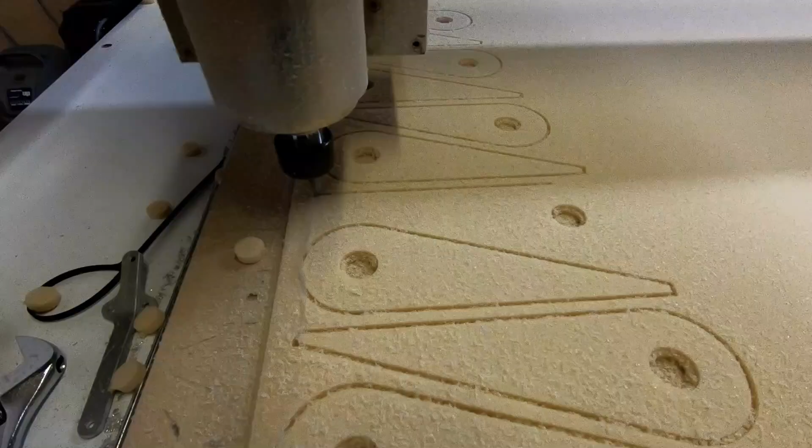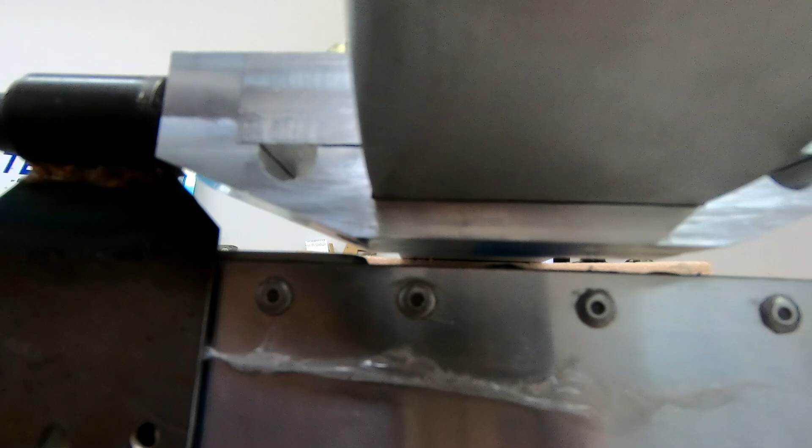Well, I've got the clamps on the gear and I've got them positioned in what appears to be the correct spot. You can see my gear has got a substantial gap underneath here. It's going to end up being about 8 millimeters from the bottom of the fuselage to here. If you look underneath the edge here, you can see the gap I have between the bottom of the clamp and the side of the fuselage.

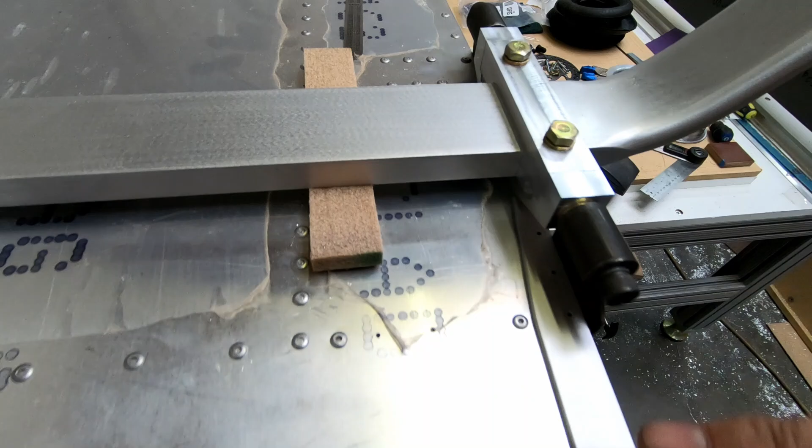Now, I'm going to get this probably another millimeter lower. You can see where the corner of this bracket is about ready to hit this doubler plate that goes over here. So what I'm going to try and do on the inside is come in here with a file and just file down the corner a little bit more, just to round this off, because I think I can get this down a little bit further.

But this is where they're supposed to be basically, even for the fiberglass gear. It should be a little bit lower than this. Like I said, it should just clear those rivets. And looking at the alignment here with the brackets, you can see I'm right on the edge of the opening of the wing spars. On the other side, I'm centered right now on the hole that needs to be widened eventually and lengthened for the wing pin that goes in the back here.

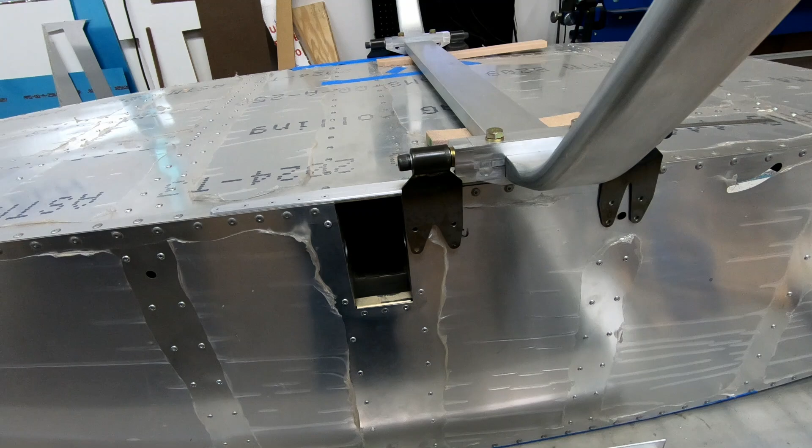So I think what I'm going to do is just go ahead and start drilling this. I don't see any reason not to. These brackets are identical on both sides, and as long as I align the front one and align the rear one with the hole, I should be sure that I'm at least square with the fuselage on both sides. So that's what I'm going to do, start seeing if I can get this attached.

Well, I drilled my first 2 holes here and flipped the fuselage right side up so I could check inside and see where those holes were ending up as far as corresponding to frame 4 here that it's going to be attached to. And I've got a couple issues here.

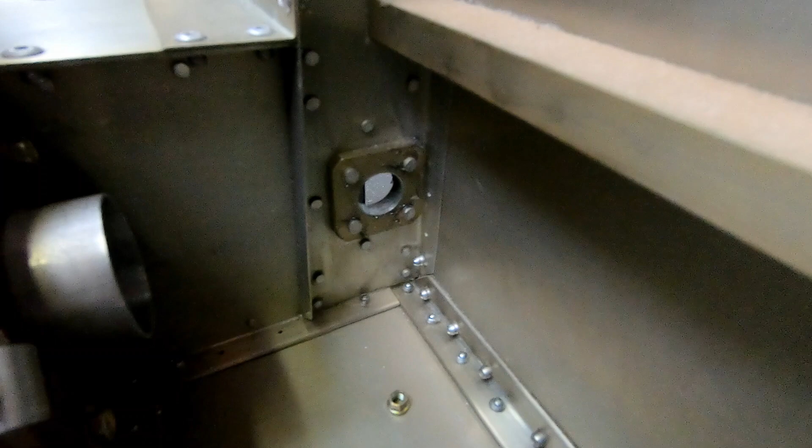So those holes come through, and I think you can see them right there. Now I've got them a little bit too close to frame 4. They're a little too far forward, but because I just drilled 1/16-inch holes, I can move them aft enough to get it a little bit more centered in frame 4 and give myself a little bit of clearance there.

But that top hole is supposed to align, apparently, with that notch that's cut out in the wing pin plate that's there, and it's actually a little bit low. I can't really raise it up on this side, because otherwise my brackets for the landing gear will hit the fuselage, and I certainly don't want to get them too close.

I'm going to come over here and grab this one here. Now, I've made these properly. I went back and remeasured these to make sure that the center of this hole lines up with the top. I've got the right distance here, I've got these holes in the right spot. So these holes are all in the right spot.

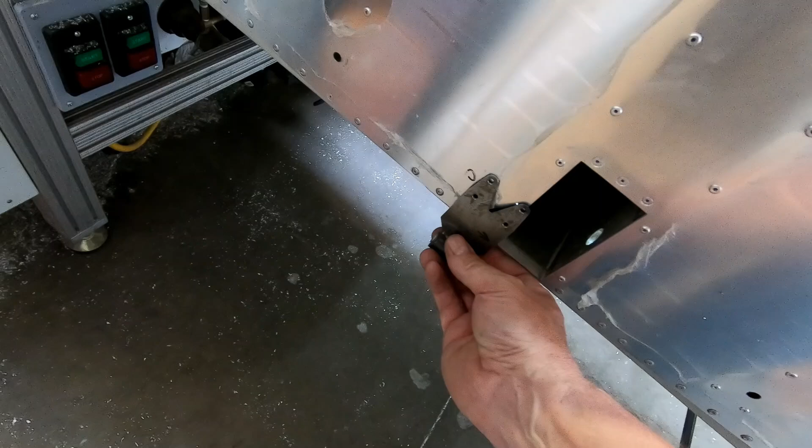But according to this, where I've drilled these holes, this is a little bit low, and I really should be raising it up a little bit more. Now, I really can't raise it up much more, like I said, or I'm going to start hitting underneath here. So I'm going to have to play around with this a little bit more and see what I need to adjust to get these 2 holes to line up.

There's a possibility, I mean, even with this nut down in here, even with the small nut, it fits. It does fit in that little hole there, but just barely. It certainly doesn't go low enough to get down to where my bolt's coming through. It's close though, so I may have to actually get a Dremel tool in here or something and just get on the edge of that plate a little bit, just to notch it out a tiny bit more, a little bit lower, to make sure this will fit.

But this is all very, very, very tight. So I'm going to keep working on this, see if I can get this first plate mounted in the right spot.

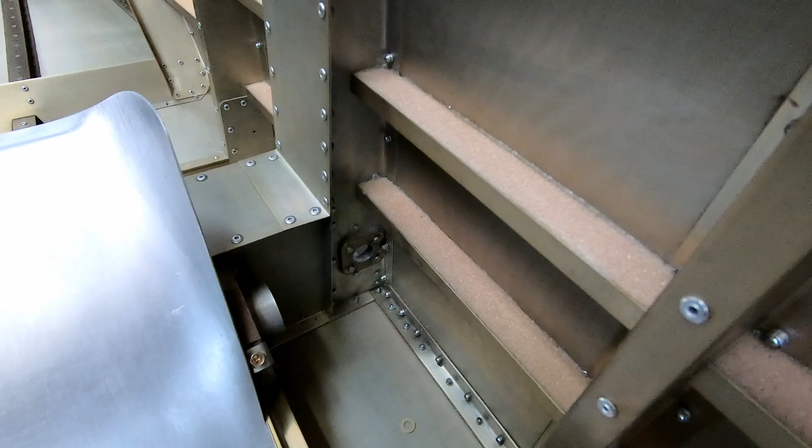And I'll show you what I end up with here in the end. I took the washer out of here and moved it to the front to move this bracket in a little bit more. That's just to make sure that I stay centered on the back here with the hole I already have, and centered on frame 5.

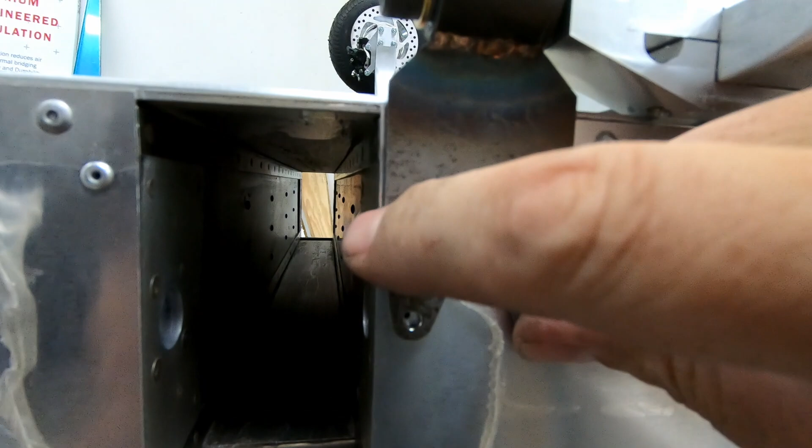And so if I hold this here now, you can see I've got a little bit of a gap between the plate and the spar box, which is fine, and I'm right on the edge of where I've already drilled my holes. So I can move those holes over a little bit, which I think will be good.

I'm going to go ahead and try and leave it at this point. What I'm going to try and do is, since I'm hitting here on the corner, I still have a little bit of gap, but that means I can trim a little more or shave down on that doubler plate on that corner to get this to come down a little more.

So I'm going to put those holes like that. I'm already stuck with wherever I drilled these already, and I can't really go outside of where those holes are. So I'm going to try and put this bracket basically right there, and I think that'll work.

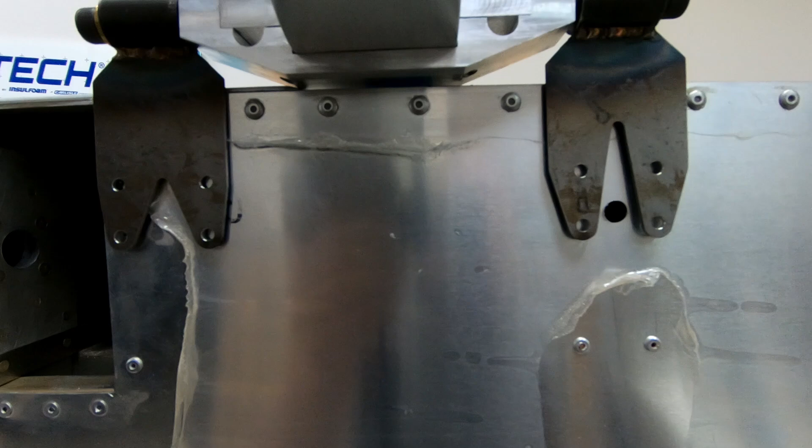What I can do with this washer is, since it's a little bit thick anyway, I'll put a thinner washer here which will push that back, and a thinner washer here which will push this forward a little bit. And because I know I'm centered on this hole, this should be centered on frame 5, so I should be good there. It's just a matter of getting this fixed and positioned in the right spot.

So I'm going to try and drill these holes right there and see what I end up with. I thought of something here when I go to fix this. Instead of finishing drilling these holes, I'm going to drill these other two holes and get some bolts in here so that this thing won't move at all.

And while I've got this aligned with the edge of the holes I've already drilled, I'm just going to use this steel plate as a guide for my drill bit to go through, so I can get through the aluminum without that hole walking around. Since I already have that, the only other option is to try and walk that hole over to the center, which I just don't want to mess with right now.

So I'm going to drill these two holes, get some bolts in here to hold this in place. Then I'll come back and drill these out, and I should be good at that point.

I've got the right side fuselage brackets drilled in. They look pretty good. I've got to flip it over though and check the inside.

But one thing I would suggest when you're working on any of the fuselage stuff is it's handy to just go to the hardware store and pick up some number 8 and some number 10 screws, nuts, and washers so that you don't have to deal with trying to use your aircraft hardware and also deal with the lock nuts.

I've been always stacking up washers on behind here, but now I'm going to run to the store and go get some number 8 bolts just to hold all this together as I'm fitting everything in place.

But you can see underneath here I've got a very slight gap above those rivets with the fitting. I am hitting on this corner, which is fine. Like I said, I'm just going to file off the end of that doubler there, and I also can do a little bit more rounding on the edges of the clamps here.

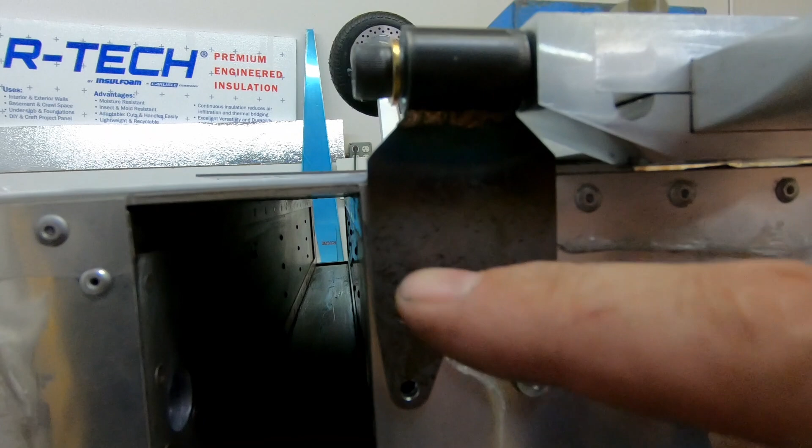But I'm going to try and position the other side in exactly the same spot. You can see the slight gap I ended up with here on the edge, just to get this away from the side of frame 4, to give myself a little bit more clearance. But this looks like it's going to work. I'm pretty happy with this.

I do need to go back and just get some thinner washers here to put on either side, just to finish getting the clamps in the right spot. But yeah, this is looking pretty good. I'm going to go ahead and try and do the exact same thing on the other side, and then I'll try and flip this over. So I've got both sides drilled now for the brackets that hold the clamps for the landing gear leg.

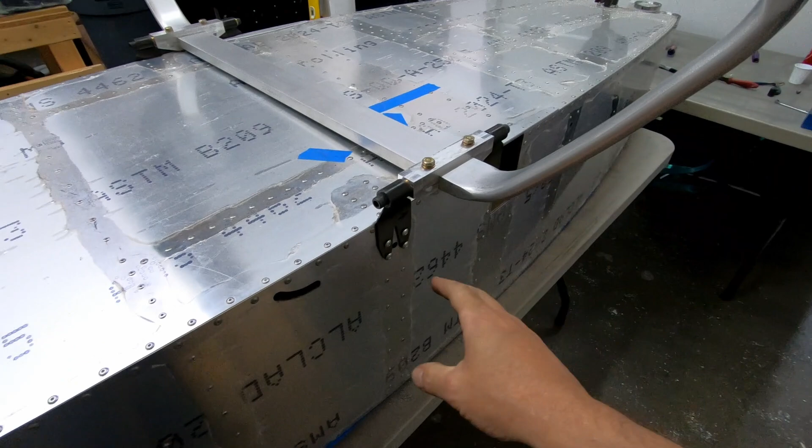I think what I'm going to do next is pull the landing gear bow off. What I can do is unbolt these here, take the leg off, put the clamp back on, then flip it over and see exactly how everything's fitting and how the holes are lining up. I'm going to get some temporary hardware at the hardware store so I can bolt this all together with complete bolts and washers, just to have it upright and actually use the gear now.

When I take this apart, I'm also going to file down and round off that corner a little bit on that bracket there. But otherwise, the gear is pretty much attached at this point, or can be attached. So now it's just a matter of getting the hardware installed.

The other thing I haven't done yet is cut out the shims that are supposed to go on both the back side and the front side of these before I permanently attach any of this. Again, I'm not sure I'm going to permanently attach this right now. I do have to take these off and paint them, and depending on what we do with the airplane as far as painting and finishing it, this might all need to come off again too. So I'm not exactly sure how permanent I'm going to make this attachment.

I really don't like to wear out the lock nuts if I don't have to, but I'm going to keep working on this, and I'll show you what it looks like when I get it right side up so we can actually look at the holes from the other side and see how things lined up.

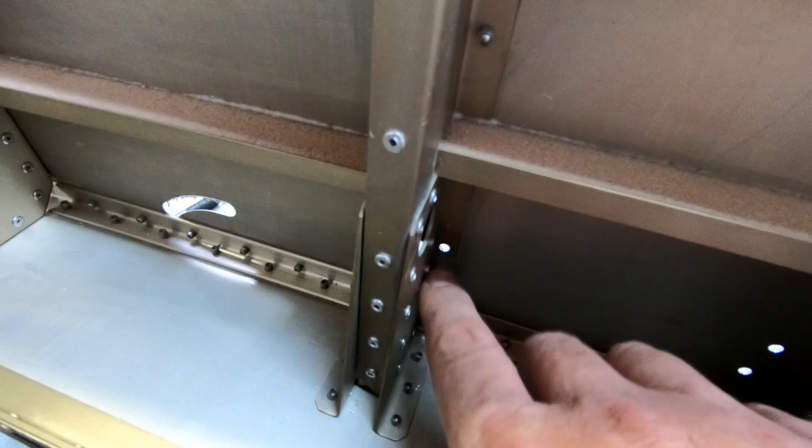The most I could do is take a washer and maybe grind off one side of it to fit it in there, which actually isn't too bad of an idea because we've got this radius inside where this frame is bent. Taking a washer and grinding off the edge until it fits flush against that frame, then rounding the bottom edge that touches this to give it that little radius. You don't want to tighten a nut here and have it hit that radius and damage it in any way, because that's where you'll end up with a crack. So I might put a washer in there and trim it to fit and radius it so it makes a nice edge with the frame.

But I still have an issue here with this top one. This is going to be really tight getting it in there, and I may have to do a little grinding away at that pin plate, just a little bit, so I can get a nut inside of there. The rest of these should be fairly easy to get to, but yeah, this looks good. This is as good as it can get.

So I'm going to go pick up the bolts I need from the hardware store to put all this back together temporarily, and get those shims cut. In fact, I might cut the shims first so I can put this all back together with the shims in place that need to be there. Then we'll get the gear on and see what it looks like with it on the ground.

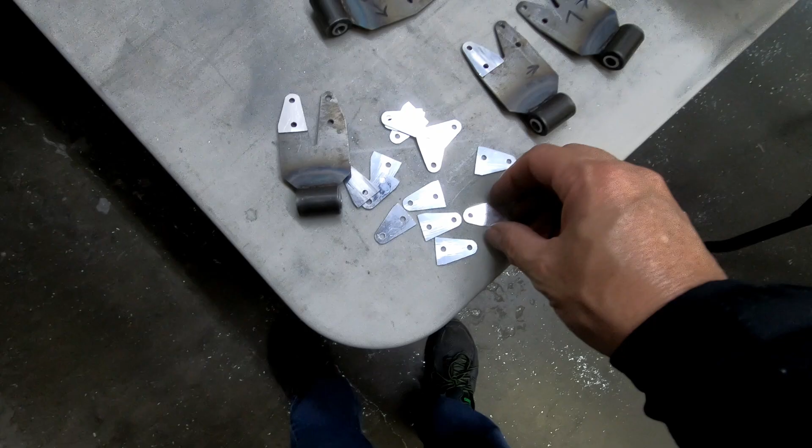So I cut out all these 40 thousandths shims that we're supposed to use with these landing gear brackets. These are actually made out of aluminum, and I originally bought a piece of 40 thousandths steel, assuming these were steel because of the steel brackets here, but they're supposed to be aluminum. Half of these are different.

Half of these brackets are matched to the profile of the rear bracket, which is this one, and the other half are matching the front bracket, which is this one. So I'm going to go ahead and assemble the gear now on the fuselage and just get this on its wheels, using temporary screws that I picked up at the local home store.

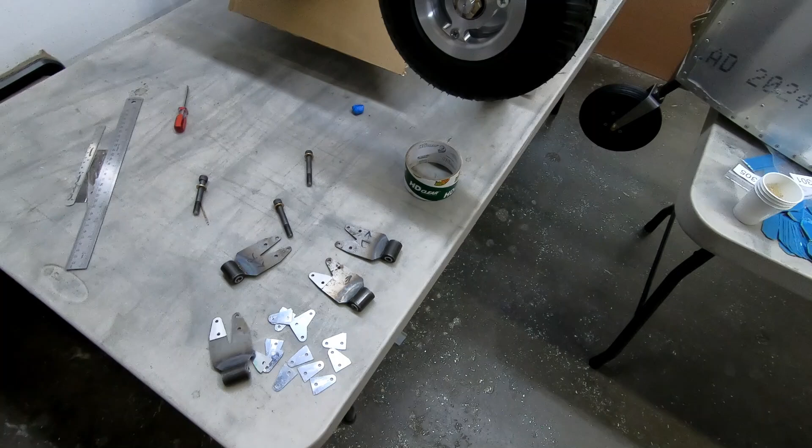I'm just going to get everything bolted together and make sure everything fits and looks good. Once I know everything fits and is exactly how I want it, I'll pull it all apart, get these steel brackets painted, get these shims alodined, and get the final finishing done on the actual clamps. Then once I get all that done, I'll put the real nuts and bolts on there and assume it's not going to come off. So I'm going to start assembling these on right now, and I'll show you what it looks like when I get the fuselage on its gear.

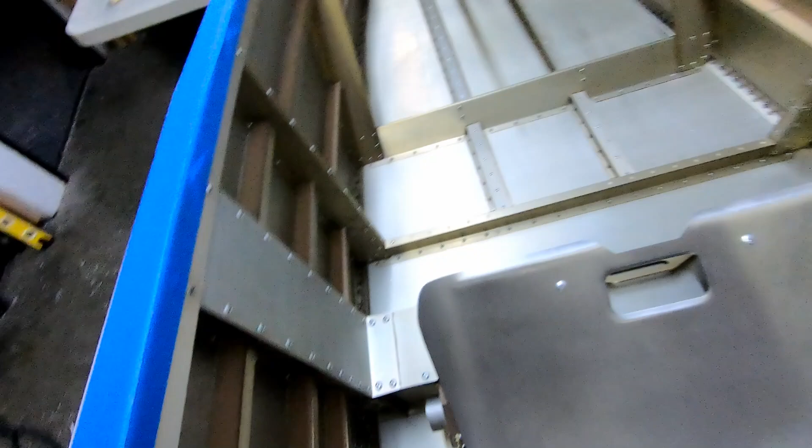Before I flip this over, I wanted to show you I got the brackets now installed with the shims on top and my temporary screws. I was able to get all the bolts in without a problem, except for these top ones here, which are hitting that pin plate for the wing spars, as you can see down there. The nuts on the rest of these just fit right between the frame and the hole, basically the flat side of the nut fitting right up against it, and that's pretty much the way they are all the way around.

Like I said, I have the same issue over here where this bolt is not lined up perfectly centered on that little notch for the pin plate. So I'm going to have to do a tiny bit of grinding in there to make sure I can get a nut inside that area. It's very close because the gap between this plate and the side here almost allows this nut to fit in there regardless. But either way I need to grind a little bit away to make sure that fits.

Okay, so I'm going to flip this over and go ahead and mount the brackets in here and get the gear on, and then I'll set this thing on the floor. Well, it's officially on the ground and on its gear.

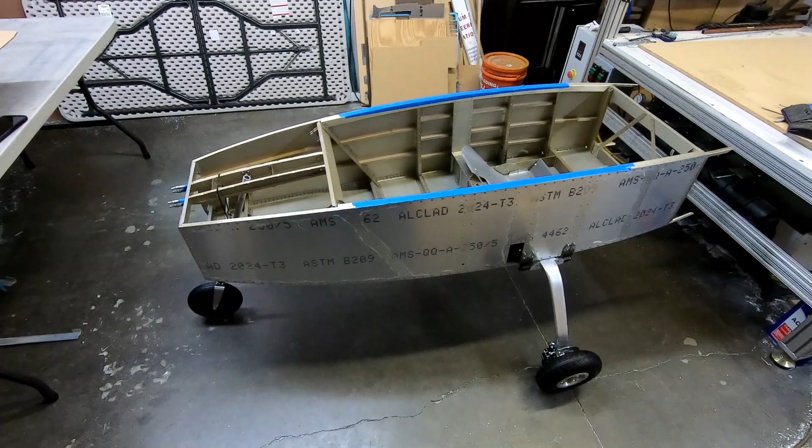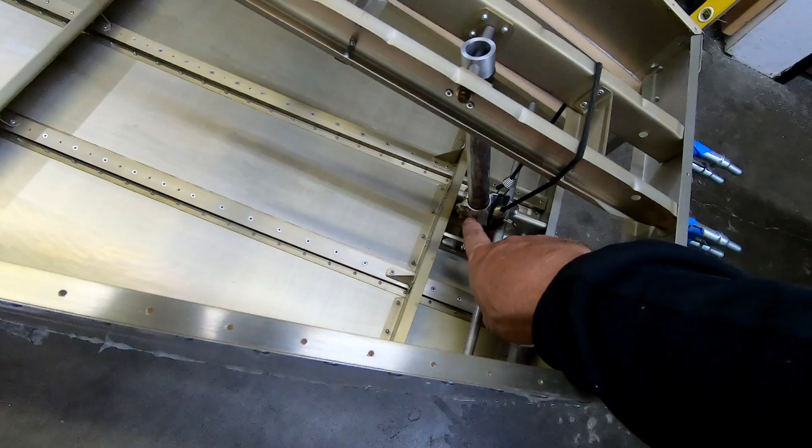It looks really good. The only thing I am noticing is that either the main gear is a little bit too tall, or the nose gear is a bit too short. Now I know the nose gear isn't short - it's made according to the plans. The only thing is that the tube I'm using, because I didn't want to waste extra material, I bought 4130 tubing in a foot length, so it's about a quarter inch shorter. However, the bracket we're using as our clamp mechanism on the front is shorter also, which moves the spring point a little bit higher. So I've actually got probably more travel on the nose gear than the standard plans configuration.

So I'm not exactly sure. It's at enough of an angle here that even putting weight in the airplane and letting the gear down a little bit further just because of the spring force isn't going to change the angle of this as much as I'm probably going to want.

Now here's what's interesting about the Grove gear - if you look down here, there's a fairly large flat plate area back here where the axle is. I could cut off the bottom of this probably an inch, basically to the top of the 5/8 axle hole, and re-drill the axle hole a little bit higher and do the 4 bolts myself. I might actually do that because I really don't like the fact that it's sitting a little bit too high here, and I don't want to extend the nose gear any further because there's only so much travel we have inside the nose to begin with.

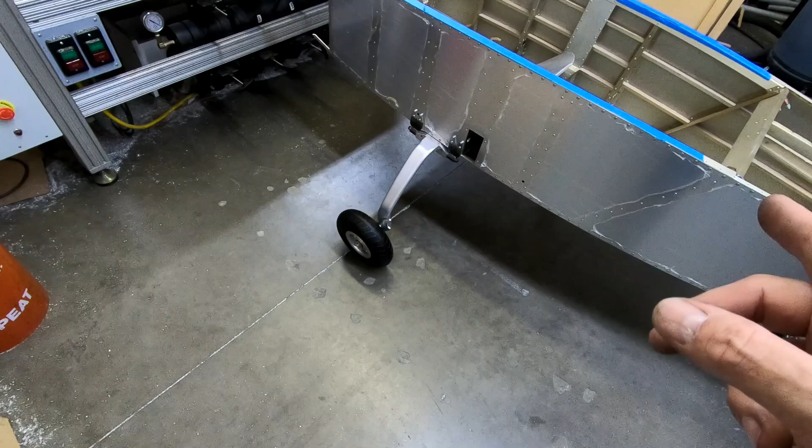But yeah, I'm actually quite surprised at this because I made this gear according to what I know other people have done for the landing gear, which is I believe 10.5 inches from basically the top of the gear leg down to the center of the axle.

I'll have to go back and look at the plans again to see if there's any dimensions on the fiberglass gear that might make a difference. But it does look like the main gear should be lowered almost an inch to make this work out. Luckily with the aluminum gear here, I do have the ability to adjust that quite a bit, and I think it'll be just fine.

That's something I'm going to look at in the future. When I get a little bit closer, I don't know if I'm going to put the tail on it next, but I might put some weight in this just to see how much this gear actually will spring down and if it makes sense to keep it like this or make it lower. I am surprised that it's sitting as high as it is.

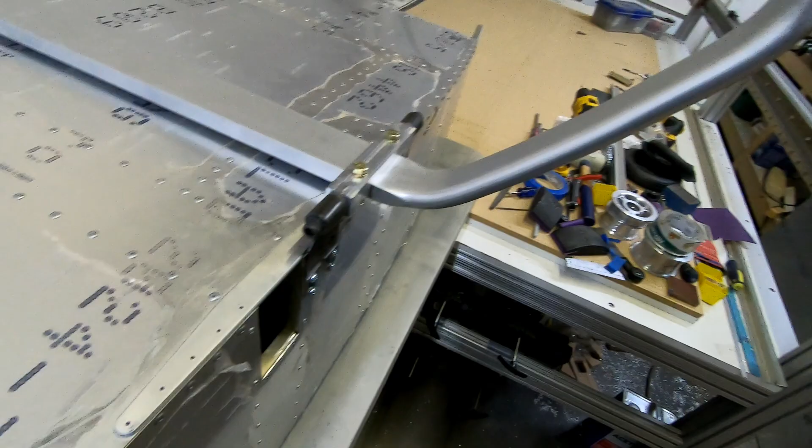I've got to double check some of the dimensions, although I don't see much in the plans as far as what the actual distance should be from this axle to the fuselage or the top of the gear. I went by what I know other people have used for the Grove gear when they ordered it, which was 10.5 inches from the center of the axle to the top of the gear. Now I've got another probably 8 millimeters taller, because I'm pushing this gear out even more since I can't put this gear flat onto the fuselage.

But I think what I'm going to do is, as you can see, I've got a really nice flat plate area all the way down to about here. So what I'm going to do is take this axle and move it as far up as I can go before I get to any of the bend. I'm going to re-drill the axle hole and re-drill the 4 bolt holes for the axles on both sides so that I can get this a little bit lower.

I think that's going to make a significant amount of difference because I can probably move that axle almost up to 2 inches. I don't know that I want to go that far, but I'm definitely going to move it at least an inch. In fact, I'd almost like to go as low as I can, because I'd rather have a little bit more travel up here on the front and have this a little bit lower than have the situation I have right now where it's very, very tail high.

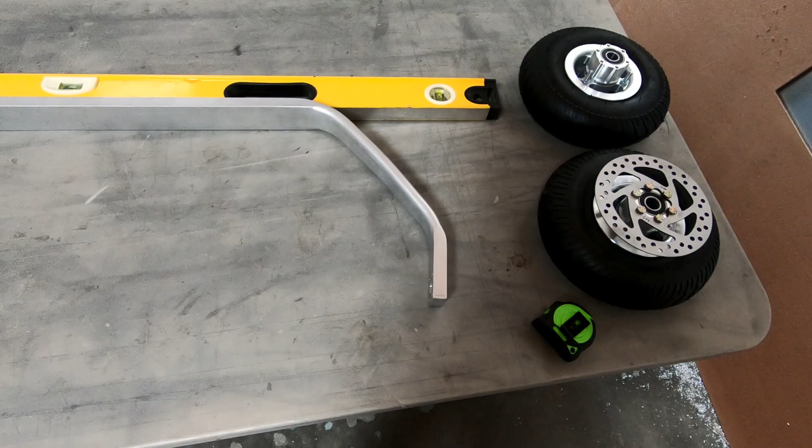I'm going to go ahead and start modifying this gear leg and move these axles up, but I did want to go back and do some measurements to see not only what the configuration is now compared to what I ordered, but also see what the configuration of this, at least distance from the top of the gear to the ground, and how much it changes with the gross weight on it.

I didn't really check that. I was more looking to see that the axles were parallel with the ground when we put gross weight on it, to know that the spring was essentially the right amount for this gear and this configuration on the CriCri. So I went back and started checking some of these measurements.

Now, when I ordered this gear, I ordered it 39 inches wide, and in the diagram that shows how to measure the gear, it's supposed to be in this configuration without any weight on it. So I did 39 inches from outside to outside here. This is actually 39.5 inches wide.

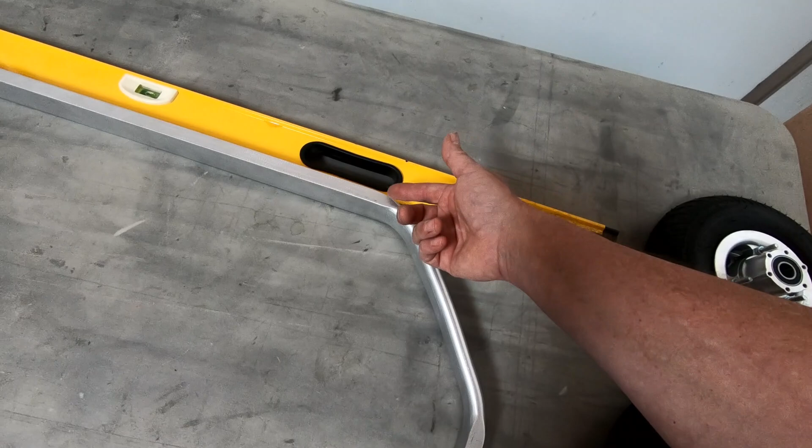And then for the distance from the top here of the gear down to the center of the axle, it was supposed to be 10 inches. Now I'm actually right at, I think it's 10 3/4 to the center. It's even a little bit more, maybe a 1/16 more than that. So I'm already more than 3/4 of an inch taller on this than I had planned. Plus we've got another 1/4 inch of distance at the top between the bottom of the fuselage. So we're already an inch taller in this configuration than I had planned to be with the original dimensions.

Now, it only appears that I can move this about 1 5/16 of an inch up, to make it so that the axle plate that mounts on the backside here isn't hitting the radius, and that we're making sure we're putting that on the flat part. What that allows me to do is basically cut this gear leg off right at the top of these upper mounting bolt holes, so I can get a nice, straight, clean cut across here, and then mount the axle from there up.

But that's only going to gain me 1 5/16 of an inch, which I'm hoping is enough. There's nothing else I can do after that. At least that gets it closer to where I had expected this gear leg to be when I ordered it.

So I'm going to go ahead and put the axles back on here. I'm going to set up my little rig that I had before with the weight on it. I'll measure the distance from the top of the gear to the ground with no weight, then compress it with 400 pounds at gross weight and see how much lower this gets. I can't imagine it's going to move much—maybe an inch, not sure it'll move more than that.

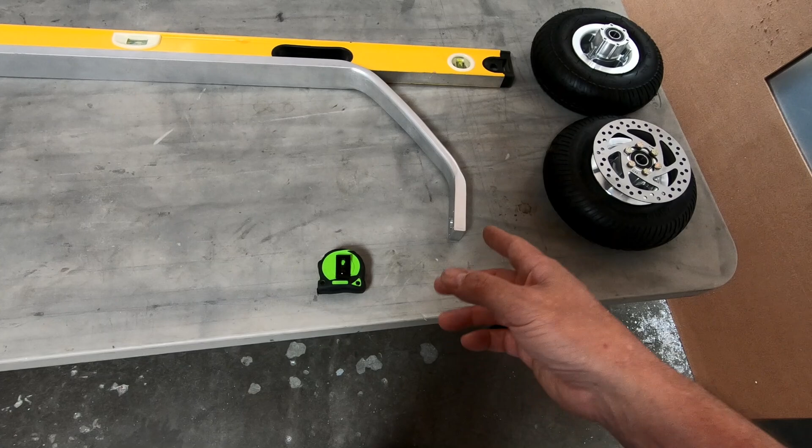Now, I am going to get some compression on these tires, so the tires will flex. It'll be interesting to see what happens, but I still feel like I need to get this gear as low as possible, and I only have so much adjustment here—I can't do anything else. If I have to, I'll get a slightly longer nose gear if this isn't quite enough to get the airplane level on the ground.

So let me start working on this, and I'll show you what it looks like when I get a little closer to figuring out what's going on here.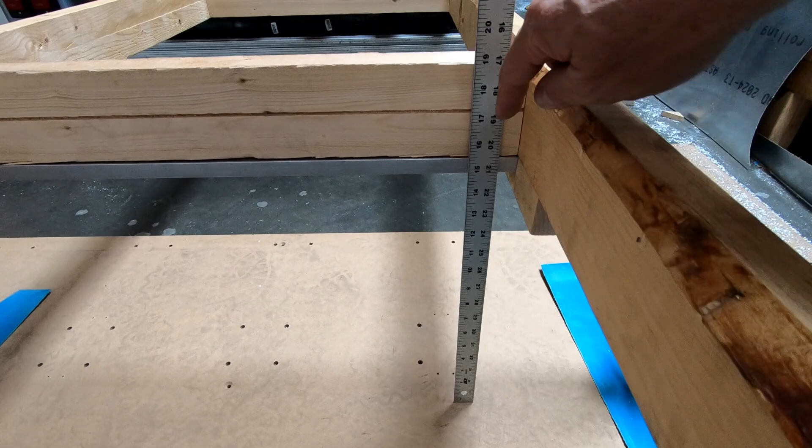Well, I've reset up my precision landing gear test rig to try and do some measurements here. Right now, from the top of the gear leg down to the ground, we're at exactly 15.5 inches, with no weight other than the lightweight 2x4s holding this up.

I don't have my precision digital scale here today—my wife wanted that back in the bathroom. But I remember what weight I put on the front before, so I'm going to load this up with everything I had on it to simulate gross weight at about 400 pounds, and then retake that measurement.

The other thing I'm going to check is measuring underneath the gear leg to the ground, just to see how much that distance changes, which will tell me how much the tires are being compressed. I believe I have 30 psi in each tire right now. So let me set this up and take some more measurements.

Okay, I've got all the weight placed on the front here, and I think we're down to 14.25. So we went from 15.5 to 14.25—that's a 1.25 inch drop with gross weight on it. So we have to assume the airplane would drop that equal amount on the main gear.

So I'm going to have to go do some calculations on the actual nose gear extension and figure out where level is with the nose gear all the way out at full extension, to see where this should be when we're basically at empty weight on the airplane.

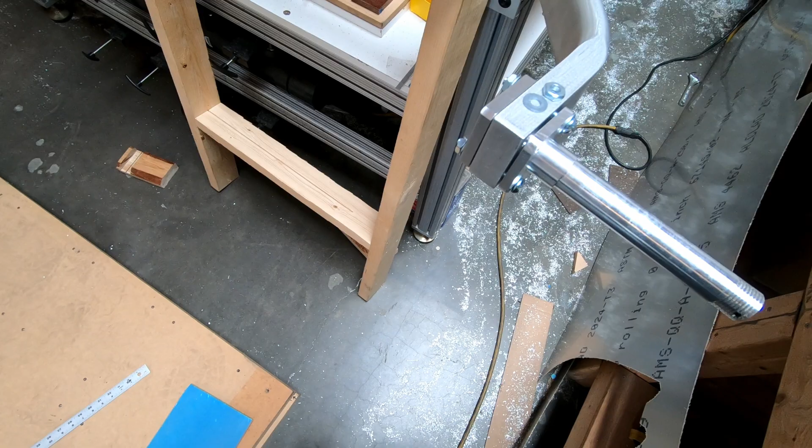I noticed when I went to put these axles back on, since I took them off yesterday, that this cheapo hardware store hardware from Lowe's or Home Depot, these bolts are actually stripping with gross weight on these axles. So you can see how important it is to have good quality hardware, because this is not. I don't know the strength of this compared to aircraft hardware, but it was interesting that just putting gross weight on this was enough to start deforming these threads.

In fact, the bottom bolts on both sides are a bit hard to get off. So anyway, just thought I'd show you that—this bolt on this side completely stripped out.

So I've decided to just go ahead and modify this gear leg and move this axle. I haven't gone through the process of calculating, based on the figures I have, what's level at gross weight of the airplane with the main gear compressed and the nose gear in the position it's going to be. But the problem is I don't really know where the nose gear is going to be, because I don't know exactly how much weight is supposed to be on the nose gear and how much the nose gear is going to be compressed at that gross weight.

So I just know for now, based on where this is at, this is off. I have to lower this, and I really only have two options, because I could put these bottom holes here and align them up with the top holes and then cut it off. So instead of the gear axle being here, I could put it up here and align these holes.

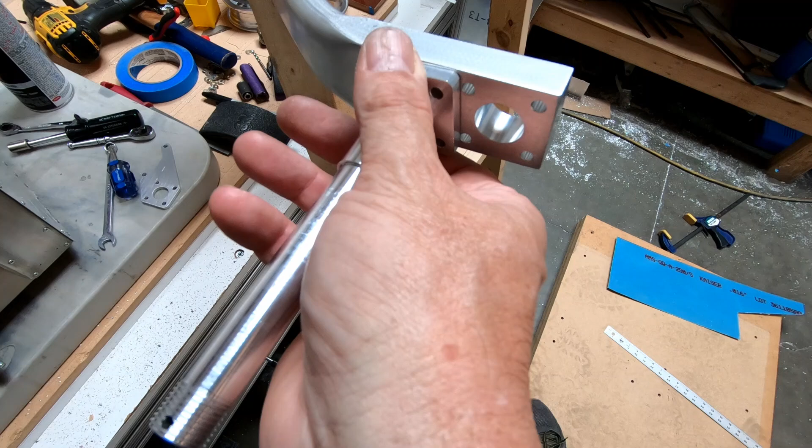The problem is, as you can see, the center hole actually protrudes into the area the axle is going to be, so I'm going to end up with a cutout at the bottom of my gear leg, which I really don't want. So the only other option is to line up the bottom edge of this axle with the top edge of the hole, so I can cut this gear off and get a clean, completely flat bottom section. Now I have just enough room, it appears, to do that. If I put this here, if I were to cut the gear leg off, the curve starts right above there. So I literally just have enough space to make this work, to get this axle moved from here up to here and still have the bottom of the gear leg cut off flat.

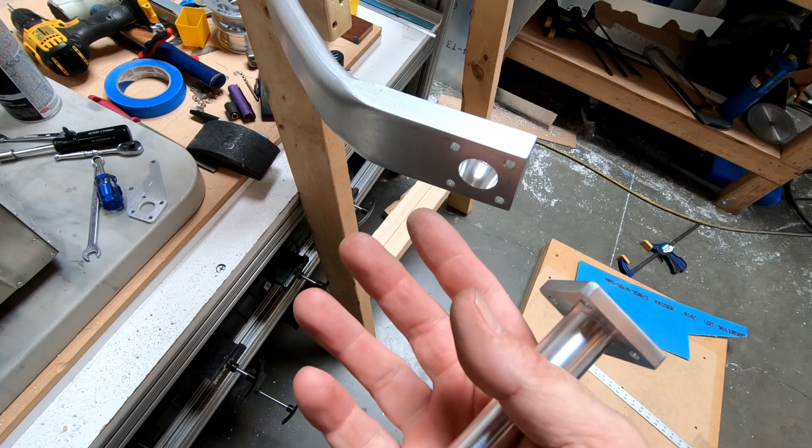That's what I'm going to do. I think that's the best solution. That still only gets me 1 3/8 of an inch shorter. It's the maximum I can go here. And I still don't think that's going to be too short at all. In fact, I still think this gear leg is going to be too long, especially with how stiff it is.

It just doesn't flex enough, even at empty weight of the airplane all the way to gross weight. I actually found out that even though we had an inch and a quarter of travel between the top of the gear leg and the ground, from completely empty with nothing on it, not even the weight of the airplane, all the way up to gross weight — when I went back and calculated from the base here and how much this changed to the ground, 3/4 of an inch of that inch and a quarter was actually compression of the tire itself. So that only meant that the gear itself springing out only moved up to 1/2 inch, and that was it. And that kind of makes sense, actually.

Now, we also have to remember that when the airplane's completed, it's going to weigh 175, 180 pounds, somewhere around there. So it's going to have that much weight on here without me in it or gas in it. And so it's going to only flex in that middle range of 180 pounds up to 400 pounds with me being in it, compared to empty, whereas here we were testing with completely empty — we've got maybe 10 pounds of 2x4s on it, and that's it.

So there's a lot of calculations I think that have to be done here to figure out — well, even at empty weight, this is going to be sprung a little bit, it's going to come out a little bit, it's going to be a little bit lower, but it's still not going to be more than probably 1/4 inch of travel, if even that. And let's assume it is 1/4 inch, and then let's say the tire is compressed 3/8 of an inch.

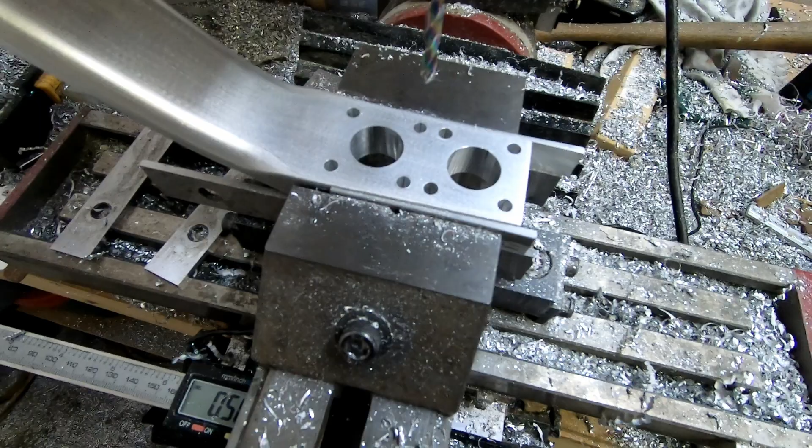At least I'll be closer with the modification I'm going to do here. I thought I'd show you what it looks like. I went ahead and drilled the holes out and just moved everything up exactly 1 3/8 of an inch. I seem to have enough room for that.

I am taking a finishing bit and just going across the top here and resurfacing both sides just to make sure that I have a perfectly flat surface. I do have a little bit of thickness on material here that I have extra. I think this is like 0.645 or 0.648 thick, and of course 0.625 is 5/8 of an inch, which is what it's supposed to be. So I'm just getting the corner up here just a little bit because it does start to curve a little bit up at the top, but just barely on the inside.

So I'm gonna go ahead and cut this off now and surface it, and then I should be done.

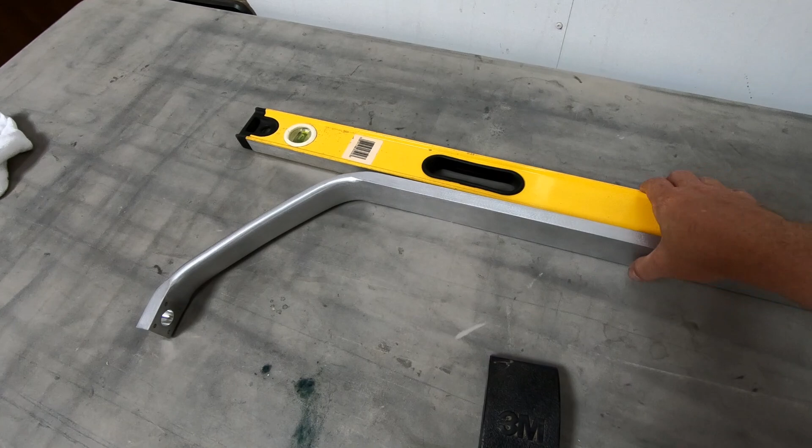Well, here's the landing gear after I cut the ends of it off and re-drilled the holes on the end here. This turned out really nice. I like the looks of it better now that these legs are a little bit shorter. I think it's gonna work just fine, but let me lay this down here. I'll just do a measurement real quickly. So let me find a tape measure, hold on.

All right, so what we're gonna do is we're just gonna measure from the end of here to the center of the hole, and it looks like I'm right at 9 3/8. So 9 3/8 down to the center of the axle hole. Down to the very bottom of the gear is about 10 3/16, it looks like.

So what I'm gonna do now is put this back on the airplane, mount it back on there, put the fuselage back on the ground, and just see if I can adjust the nose gear to where the furthest extension is supposed to be according to the plans, and then check how level the fuselage is. I want to try and get pretty close to level at that point.

Obviously, if I'm sitting in the airplane or it's at gross weight, the main gear is going to sag down, but also the nose gear is going to go down too. So as long as the sitting stance is fairly level at full extension of both the nose gear and the main gear, I'll be happy with that. So let me put this back together and we'll see what it looks like.

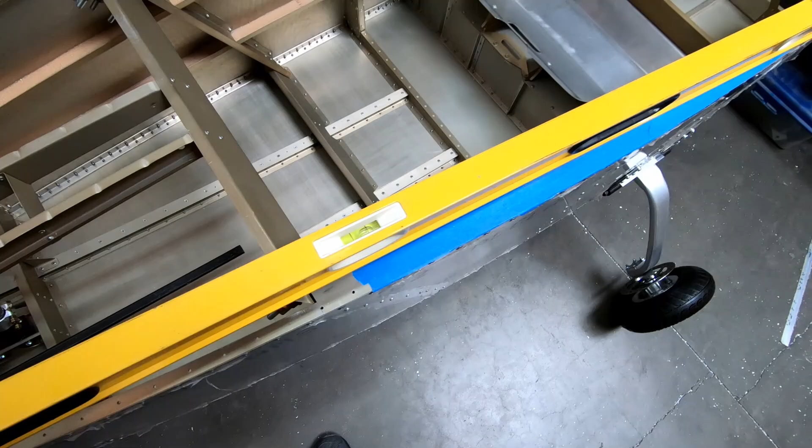All right, so this is the fuselage back on the ground again with the slightly shortened gear. It's much closer to level now, although it's still off. You can see the bubble here where it's at. So what I've done is I've put a block up here in the front, measured up exactly the same amount that the rear part of the level is here from the center of the fuselage, and just put a level across there. It still is nose low.

In fact, I think it's about an inch nose low. In other words, if I raise this up until I get that bubble in the center, there's about an inch gap under here. So we're closer to level, but we're still not level, and that's with the nose gear positioned with 85 millimeters between the lower shock mount and the upper shock mount, which is supposed to be, according to the plans here... I think it's 102. Hold on.

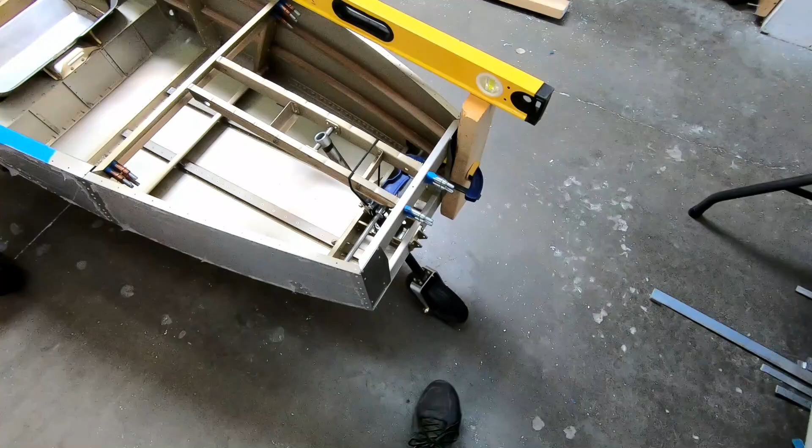Yeah, in the relaxed state, the distance between the upper and lower shock mount should be about 102 millimeters. So I'm 17 millimeters, which is about 3/4 of an inch even lower up here in the front, with the nose gear extended that much further than it probably should be. So I'm not sure. Obviously, I can't go any lower with the setup that I have here. I'm just going to have to deal with it. I may have to do a slightly longer nose gear in order to compensate for that.

I could also put a block underneath the fork, between the fork and the steel plate there to extend it. I could also make a longer fork. Lots of things I can do to make this more level if I need to. Now, there's really no weight on this. There's not 175 pounds of empty weight on this right now. I don't have the tail on it, I don't have any of the controls in it. So that's going to settle it down a little bit more, but it's something I'm going to have to watch during the build when I get closer to the end and see where I'm at and how this thing looks. But for now, I'm going to keep moving ahead.

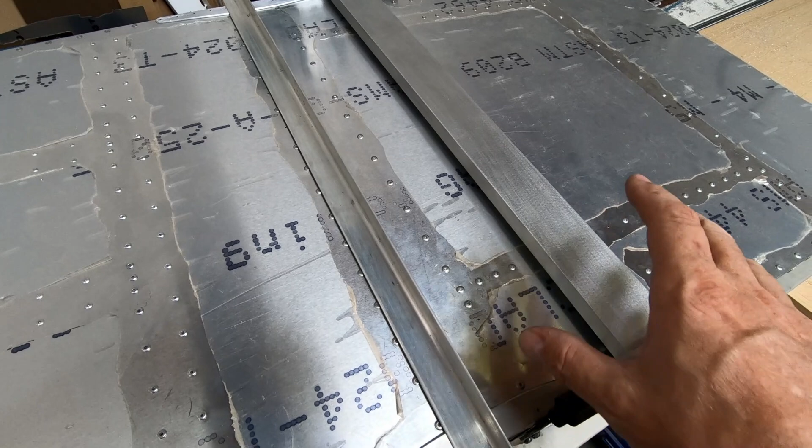All right, so we're going to move on to the next thing on the landing gear assembly. What we're going to do next is start to make the angles that are going to go on either side of the gear leg on the bottom of the fuselage.

The purpose of this angle that is going to be installed here is to support a bolt that is going to go through the center of the gear here and actually prevent the gear from moving side to side.

We're going to put an angle on this side, a bolt through this, and also a bolt through the landing gear, but it's going to be at a hinge point, so that as this gear is allowed to flex when you land, because it's going to flex between this bracket and the other bracket there in the center, it's going to go up and down like this.

It's going to rotate around a mounted bracket here, but it's going to prevent the gear from moving side to side, and it's going to keep the gear centered on the center of the fuselage, so that as it flexes, the forces here that are being applied from this bracket through to these fittings and to the side of the fuselage are completely perpendicular to the ground.

So it's going to be allowed to flex but not move side to side, and it's one of the reasons why these steel plates here are actually fairly thin. If we didn't have this installed in the middle and prevented the gear from moving side to side, any side load on the tire here could push the gear over and flex it sideways like this, and cause these brackets and these clamps to hit the side of the fuselage.

So it's kind of an ingenious way of doing this gear. I've never seen another experimental aircraft that has as complex of a gear assembly as this does, with all these bushings and rotating brackets and clamps and all of this.

I got the first couple steps done on these supports for the gear. I went ahead and cut these to the right length, to 12 millimeters wide, which is what they're supposed to be here at the base.

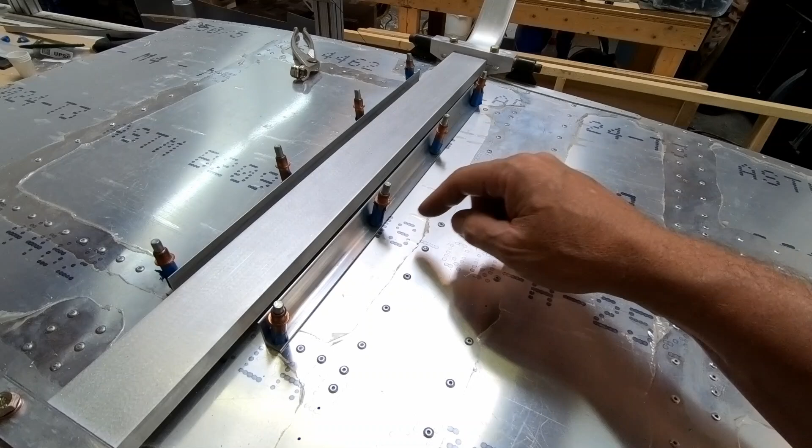And then I drilled the holes on the ends to match where the rivet holes were already in the fuselage, and evenly spaced 2 holes in between. Now, all of these holes are supposed to get a 3 millimeter bolt, or converting it, a number 6 bolt, which is tiny.

So I've only drilled these to an 1/8 inch for now, which is approximately 3.2 millimeters. We'll go ahead and drill these out to the actual bolt size later. But I'm just trying to get this all set up here.

Now what I want to do is start cutting the tall side of this. This is supposed to have a curve or an angle to it, up to the point where the bolt goes through to support the arm that supports the landing gear. I wanted to show that on screen so you can see what we're doing. I've installed these 2 angles, which is what I'm working on right now, and then we're supposed to put this little mechanical linkage here that ties the gear to these angles.

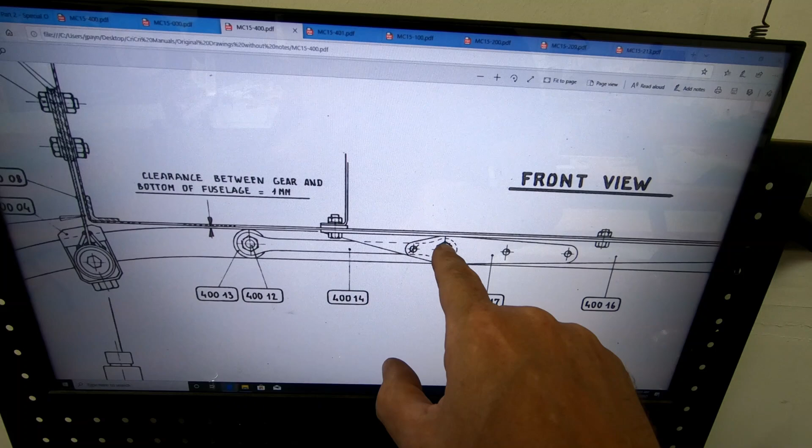You can see how these angles are supposed to be tapered all the way to the end on both sides, but I have to locate where this bolt goes, because that's where it tapers from and to on either side. Now, there's not a lot of dimensions on any of this stuff in the plans—it's kind of pictures of it, but that's it.

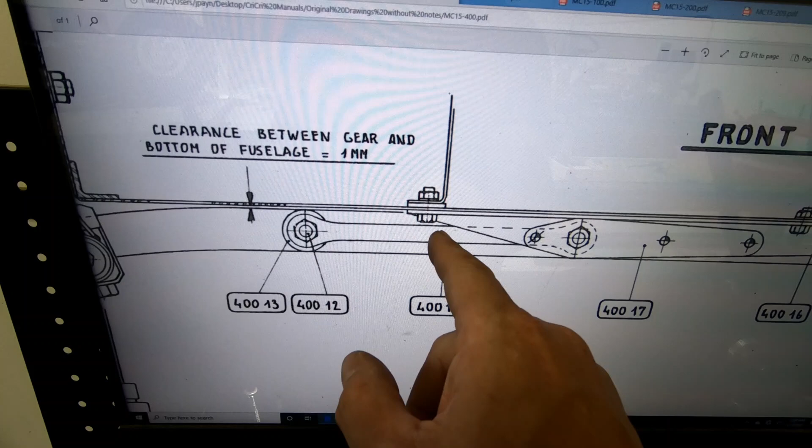I know that this arm that goes in here is supposed to be 91 millimeters wide based on the drawing. Assuming this is to scale or proper drawings, the center of it should be right at the edge of the side seat support in the fuselage, where we're putting the first bolt in on the end. That means the center should be 12 millimeters from the end of my angle. And this bolt hole should be, from that 12 millimeters in, half of the 91, which is 45 and a half millimeters from here to this center hole.

So that's what I'm going to try and locate so I can start cutting the other sides of this angle, and then we can make this doubler plate that's supposed to go over the top where that hole goes. We'll see if we can get that done.

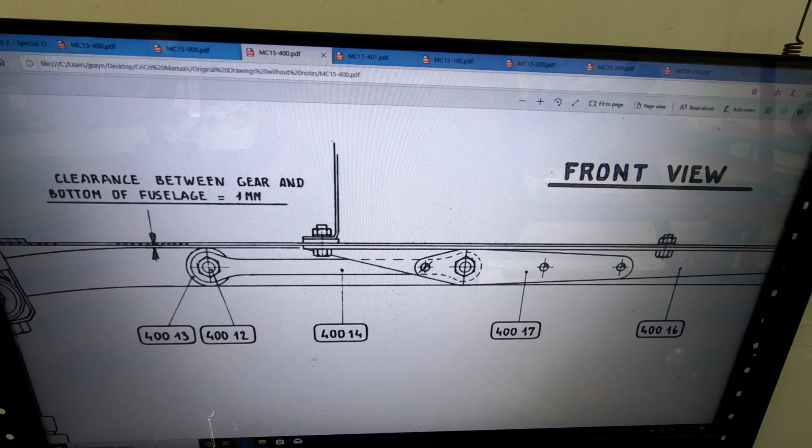Then I'll worry about making the arm, and figure out where we need to actually drill through the gear, making sure I perfectly center that landing gear between these angles on the fuselage. Let me go and measure some of this other stuff and see if I can get some of these other parts cut.

All right, I was able to cut the taper in these two angles for the landing gear. I located that hole in the right spot, and I just put a large washer around it that went to the top of the landing gear, tapering from there down to the end, and tapering back to the other side on both. So I just stuck them back in here—they look good. I'm just going to keep working on this.

I've got to start working on the arm that goes in here. That's got to be bolted, and then a bolt goes through the landing gear. At first I was questioning whether with an aluminum gear I really need a bolt that goes all the way through—I could just tap and bolt it into the end instead of drilling all the way through. But then I thought, if I do that, I don't have a way of locking those bolts unless I safety wire them, which I don't want to do. Whereas if I run a rod through that's threaded on either side, I can put a lock nut on each side and not worry about it. So I think I'll just put this in my mill and drill all the way through.

I have to drill into it anyway, so I might as well go all the way through, and then I don't have to worry about tapping it. But that was an option I thought about. It might be a little easier to do if you didn't have a mill to set this into to drill straight through. You could just tap bolts and put bolts in the end, as long as you made sure they didn't fall out. So I'm just going to keep moving ahead on this.

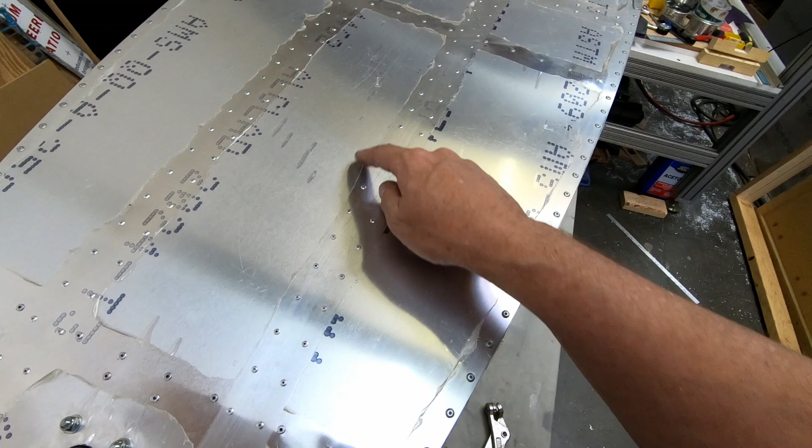I want to get this all set up so the landing gear part is done. After that we're going to work on the exhaust vent that gets installed here in the forward fuselage. We're supposed to drill a bunch of holes in here to let air come out, and then there's an air vent, kind of a reversed scoop, that needs to be installed here.

And then there's two intake vents, one here and one on the other side, that flip open and are designed to be opened and closed from inside the airplane so you can draw air into the cockpit from the bottom of the fuselage, and then it's supposed to vent back out here in the front. So I want to get those three intakes and exhaust vents installed on the fuselage before I flip it back over and start attaching the rear fuselage, because I want to limit how much I have to flip this back over and work on the underside of the airplane.

As long as I have the landing gear basically done and these angles bolted in place, I can get to all this from underneath the airplane without flipping it over, and I don't have to do any fabrication work. And then as long as I get these vents in here, I should be good, or at least comfortable at that point attaching the rear fuselage.

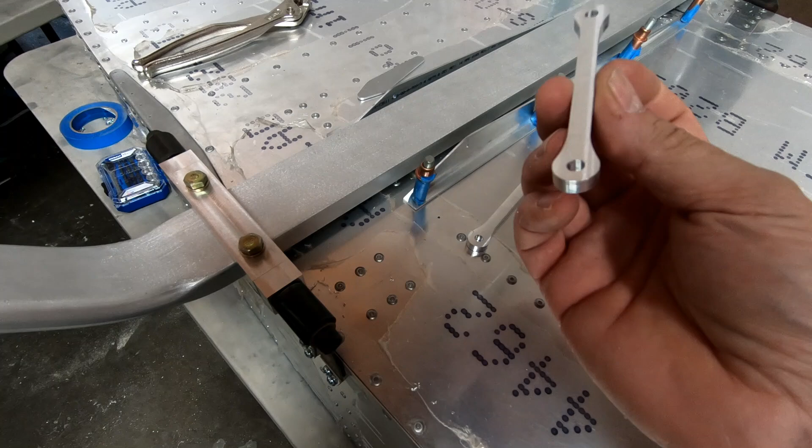I was able to cut out these dog bone parts for the landing gear. Now I'm running into some issues with how to attach these, not only to the brackets here that are supported by the fuselage, but also to the landing gear itself. The purpose of these is they get attached in between here. It's bolted to the bracket on one end, and the other end is attached to the landing gear with a bolt that goes all the way through. There's one of these on each side, and what it allows the landing gear to do is flex up and down, but not move side to side.

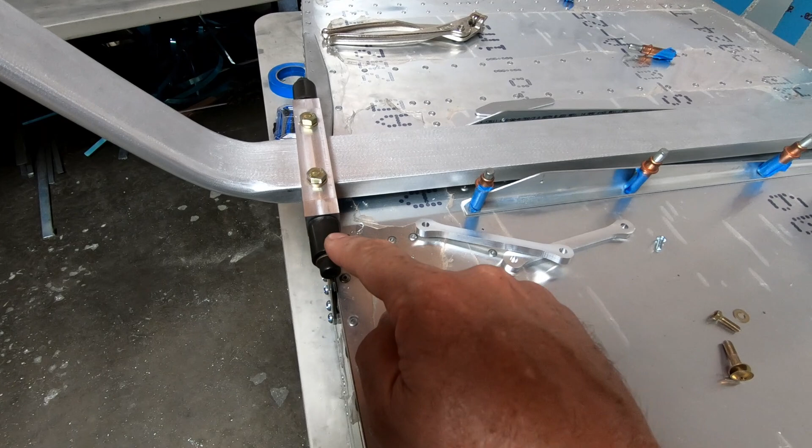So it complements the loads handled by these brackets here, in that these brackets are designed to only handle vertical loads. The vertical impact has to be straight up and down on these, with the force going into the side of the fuselage. But if we didn't put some other mechanism in here, what would happen is on landing, if this tire got hit on the side or anything, this gear would sway over and these brackets would hit the side of the fuselage.

So we're installing this kind of cool mechanism here to fix the landing gear so it won't move side to side, and these brackets take all the load vertically when you land. The pivoting of the landing gear here, along with the pivoting of this bracket, allows the gear to be completely flexible but locked in position vertically and horizontally. I've never seen this method on any other airplane, and it's quite ingenious how we're controlling the loads here with the gear.

But I'm having issues with the bolts and stuff that need to hold all of this together, for a couple different reasons. These are supposed to pivot freely on a steel bushing that we create, which fits inside a hole here that's supposed to be, in this case since we're using imperial not metric, a quarter inch bushing.

But inside that quarter-inch bushing, we need a bolt that goes through to hold it onto the bracket here, and then we need a bolt that goes all the way through the landing gear, comes out the other side, and bolts to the other dog bone bracket on the other side. So we have to have a bushing that is a quarter inch on the outside, but fits the bolt that goes through on the inside. We also need a bolt that is over 3 inches long.

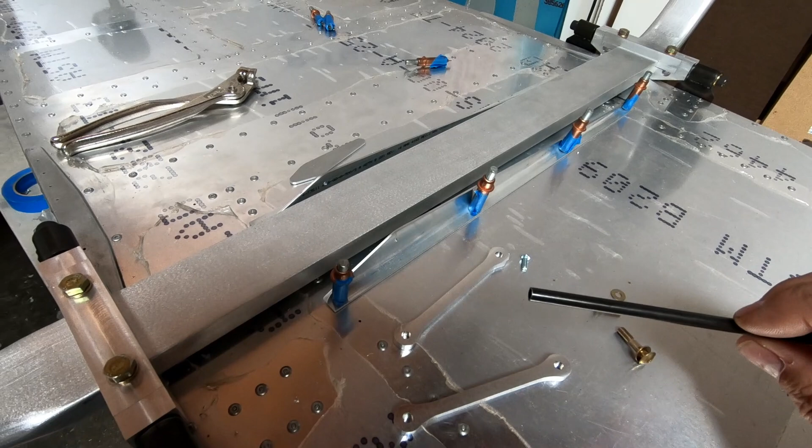Let me grab this steel tube. This is a steel tube I bought to make the handles for the main wing attach pins, the big 5/8 pins that go through and hold the wing spars in place. This material is supposed to be welded in and bent to make a handle, but I also use this same material for the upper nose gear mount for that bushing assembly that required a bolt going through it. If you watch that video, you'll notice that was also supposed to be a number 8 bolt.

That bolt was supposed to be 2.5 inches long and needed a steel bushing around it. What I did is upgrade that bolt on the upper nose gear mount to a number 10, the next size up from number 8, so that it would fit perfectly inside this quarter-inch tube.

What I'm thinking about doing is taking all the number 8 hardware on the mounts for the dog bones and increasing it to a number 10. The benefit is I can use this steel tube, which fits a number 10 inside and is a quarter inch on the outside, which is what's required for these dog bones. If I had to use a number 8 inside here, I'd need either a thicker wall tube or I'd have to machine something on my lathe out of solid 4130. It's a lot more work, and I'm not sure it makes sense.

The reason I'm thinking about upgrading this hardware to a number 10 is that the bolt, or pin, that goes through here is supposed to be a solid pin with threads on each end so we can put a nut on to attach these to our bushing assembly, surrounded by washers, so it can freely rotate on this bolt that's tight with nuts on the end going through there.

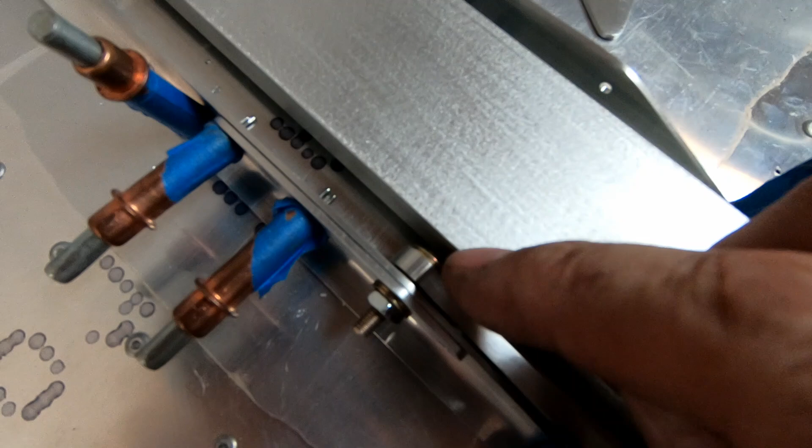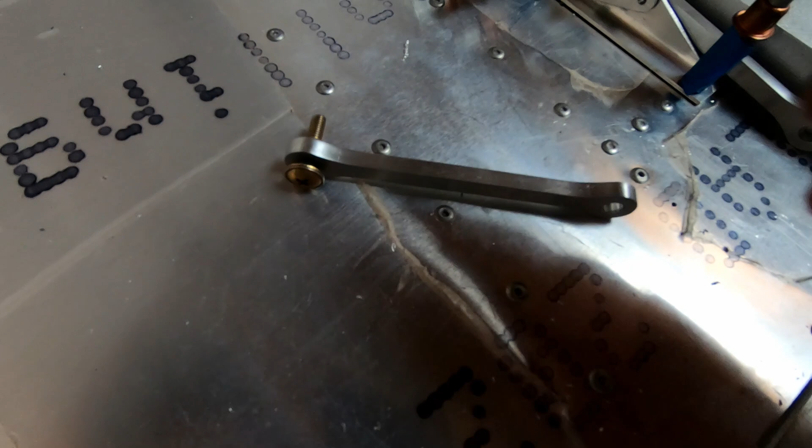So I got pretty far on one of these brackets for the landing gear. I finished cutting the bushing that goes in between the washers on either side of this dog bone. I've got one here, and you can see the steel bushing. With a washer on one side, that bushing pushes inside like so. And because that bushing is about 0.3 of a millimeter wider than this aluminum dog bone, when I put a washer on either side and clamp it together, the bushing inside won't turn at all, but the aluminum bracket on the outside will twist on that.

So I've got this one installed. Now there's a doubler that's supposed to go over the top of this angle here, and you can see the one I have over there. I just made these by hand, to the contour of the aluminum. I drew it out and just sanded it on my sander to the approximate shape.

There are supposed to be 3 rivets that hold that together - one here, 1/8 inch rivets, and one in the front here. They all get inserted from the back side. This one on the front has to be countersunk so that this dog bone assembly can get past it and won't hit the rivet head.

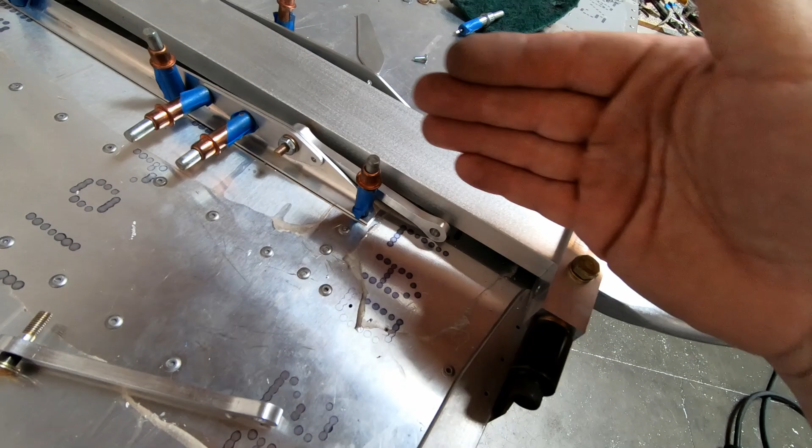This is supposed to attach to a bolt that goes through the landing gear here. There's supposed to be another bushing I have to install in here, and also a spacer that has to go between that part and the landing gear where it bolts through. Once we get that installed on either side, that's what locks this landing gear to prevent it from moving side to side. So I'm just going to keep working on this and try to get the other side done.

I've got this part ready, so it's just a matter of drilling out the holes here, getting this plate installed with the holes in there, and setting it up exactly like this. Then we should be able to center the landing gear on the fuselage and mark where we're going to drill through the landing gear leg here for the number 10 bolt that's going to attach the two sides of this assembly together.

I put a board between the tops of the landing gear here, made some marks, and found the center of that board, then with a square marked and found the center of the landing gear leg here. I then measured from the side of this bracket to the center, and the side of the bracket here to the center, then loosened these four top bolts and moved and positioned this landing gear so it's perfectly centered between the two right and left landing gear clamps.

I do have both of these side supports here all put in with temporary sheet metal fasteners, but what I'm concerned about is making sure these are centered side to side. In other words, there can't be any misalignment here. The other concern is how do I drill through this 2-inch wide aluminum landing gear straight through without the bit wandering around? I'm trying to figure out the best way to do this.

I marked the center of one of these dog bone assemblies that's going to attach here, then ran a square across with a line to the other side, and tried to line this one up with the center of it. They are very, very close, maybe a quarter millimeter off, I'm not exactly sure, just a tiny bit. Part of that is because the alignment might have been slightly different when I drilled the holes. These assemblies were matched when I made them, but when I installed them on the bottom and drilled through, there can be some slight movement.

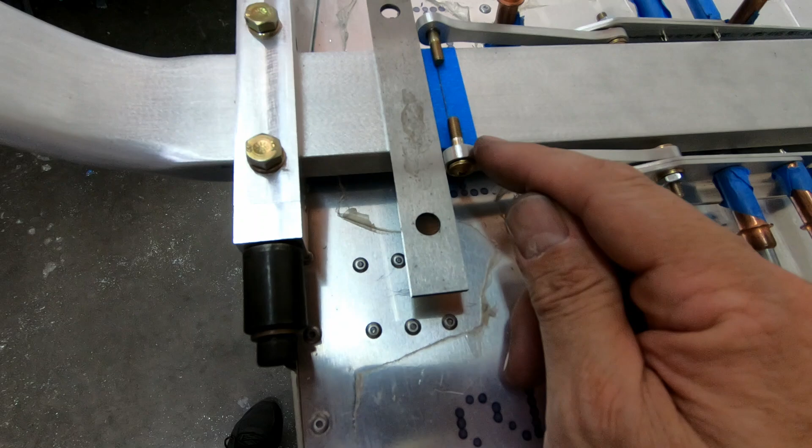I decided to cut the bushings that go inside the front part of these brackets we're attaching here, and I went ahead and put the bolts in. What I was trying to do is check the alignment of the bolts to the line that's there. Obviously it's not going to be right in the center because these are rotated up above the center line, but what I'm really looking to see is whether they're spaced the same distance away from that line. It's so close, it's hard to even tell with the eye that it's off.

I could say that this one's probably a little bit more outward to the outside of the aircraft compared to the other one, but it's so close I'm not sure that it matters. I also put a straight edge here on the end of the brackets, and measured between the bushing and the end of the bracket. They are exactly the same, to the hundredth of a millimeter. So if I put this out here, I can flip these away and measure from this straight edge back to the line just to see if there's any difference between the two.

Again, visually it's unnoticeable. So I think I'm good, but I'm going to go ahead and pull the gear off now and try to drill this hole in.

I'm going to drill from each side. I'm not going to try to drill all the way through — I just don't trust that. If it's off, then I'm in real trouble. So I'm going to put this on my mill, drill halfway through, flip it over, line up the line on the other side, drill through, and then see if I can get all the way through and how far off they are. There's nothing much else I can do. This is just hope for the best. So I'm going to drill this out.

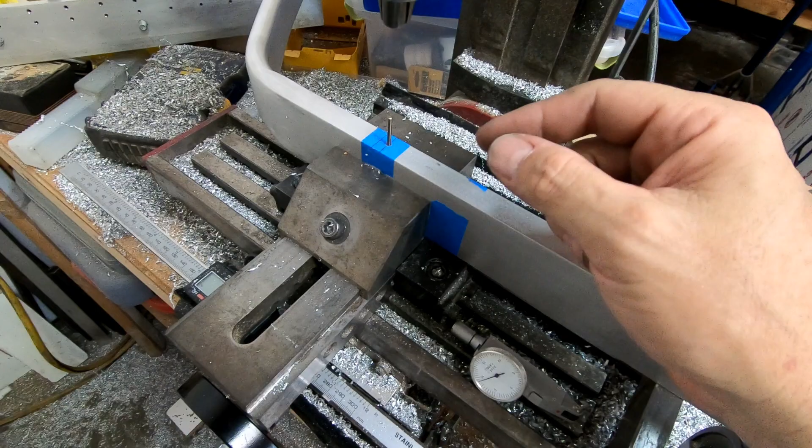I'll show you what it looks like when I'm done. I was able to drill through the other side halfway through and then drill through this side, and I've got a perfect alignment of the hole from one side to the other.

I drilled through with a brand new 3/32 drill bit that I had, just to make sure I could test with something small and then widen it out from there.

Now, I did use a dial indicator to level the gear in the mill here, so I was a little bit concerned that I wouldn't be able to get this perfectly flat. Even though my vise is perfectly flat, this is such a big piece. So I ended up putting some shims underneath this side to make sure it was perfectly level all the way across, at least a 6-inch span here. That made it so I was able to drill through and get a nice hole.

I'm going to go ahead and widen this out to the number 10 bolt size.

Okay, I've got the gear back on here. I went ahead and made these spacers that I stuck in here on either side. That's supposed to make sure these legs stay the proper distance out from the leg when this gets bolted and screwed in. Obviously this isn't going to pivot — it's going to pivot here. These are just 5mm thick aluminum spacers that have a number 10 hole drilled through them. These bolts are just slipped in here so I can check the positioning — just 1 inch or 1.25 inch bolts. It's just verifying that I have this hole lined up on either side.

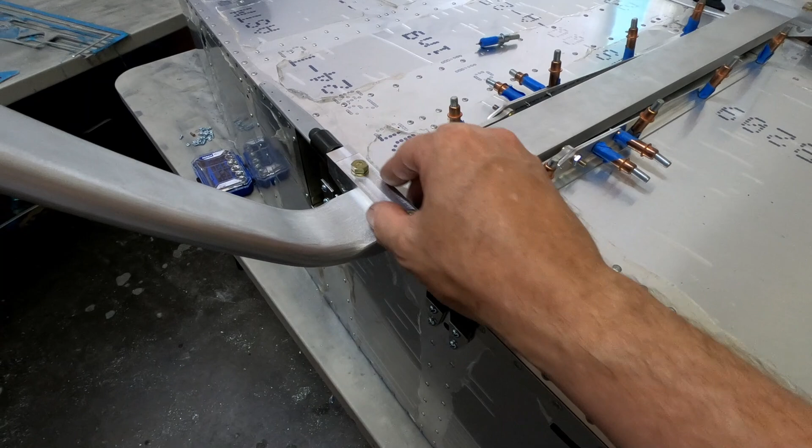So what I'm finished with now is the basic structure of the gear is done. The support brackets on this side are done, that side is done. This bracket that prevents the gear from moving right to left is complete. Now it's just getting all the right hardware and making sure I clean up everything, get the rivets that need to go in these doubler plates, go ahead and order the long bolt that I need to hold this together. We've got some finishing that needs to be done and cleanup on these brackets. I've got to paint these steel brackets here, clean them up. So I've just got all cleanup stuff to do, but at least the structure of this is all fit, and it's just a matter of finishing the little details.

So I'm going to quit for today, but I'm going to go ahead and get all the correct hardware ordered that I need now that I know everything I need to finish this, and we'll start taking this back apart and cleaning everything up.

So the landing gear support parts here, I went ahead and cleaned these up and anodized them. I installed solid rivets in these to hold these brackets in place. They're supposed to have just pop rivets in there, but I thought it would be better to use solid rivets. It was easy to use the rivet squeezer on those to get them installed. I went ahead and anodized these small parts for the landing gear.

So I'm going to go ahead and reinstall these and get the landing gear reinstalled on the bottom of the airplane. And I'm going to start working on the cover that goes over the top. There's supposed to be a sheet metal cover that goes over the top of the landing gear. I want to figure out exactly where that's going to attach on the front and back, because I'm probably going to spray the underside in that area with some primer. We also have to figure out how to do some foam supports that need to go underneath around these landing gear components. So I'm going to start working on that next.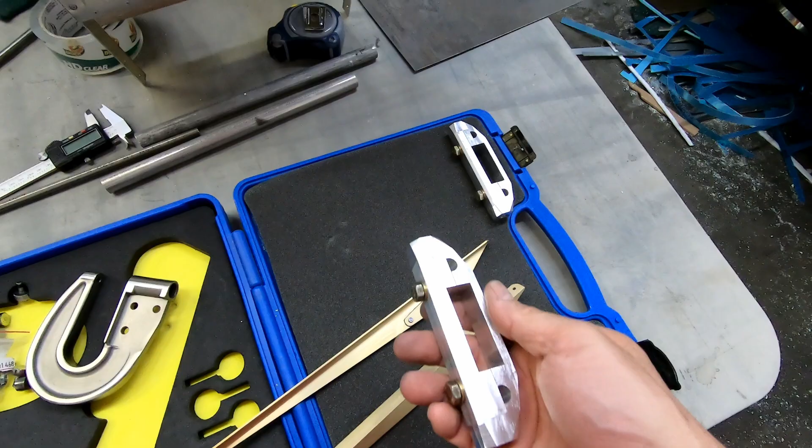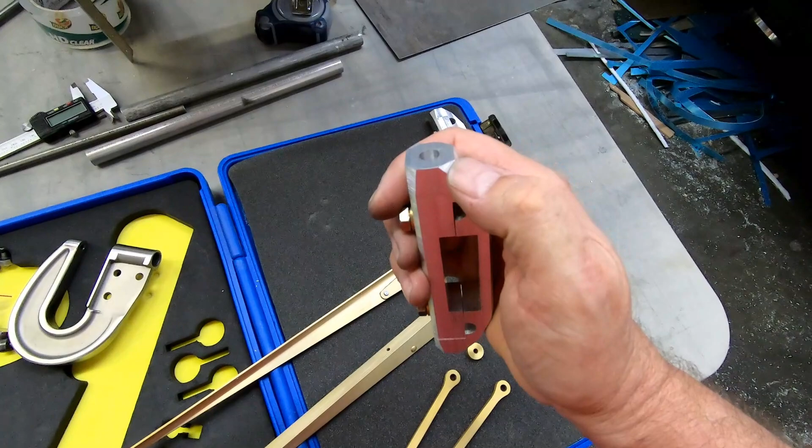So I spent some time putting the bevels on the edges of these landing gear brackets. The plans recommend a 45-degree 3mm bevel on the bottom, a 30-degree 2mm bevel across the top. Some of the other people who have recently been working on CriCris have actually rounded these completely off so that you have a nice smooth curve, and then smooth around the spot where the landing gear bolt goes through. What I did is put a washer on top, actually a 3/4 inch washer, and scribed a mark around the outside, then beveled the corners down close to that line, so I can start rounding off these edges and get them looking nice and smooth.

They're kind of nice right now, but I think I am going to keep polishing these up and continue to round the edges and get them into a very smooth looking complete assembly. I think it'll look the nicest, plus it makes it extra aerodynamic. These do actually hang out from the bottom of the airplane, so they don't get covered really, so having them as smooth as possible would be beneficial.

So I've gone ahead and primed and painted these metal brackets, the steel brackets that are attaching the clamps for the landing gear. I went ahead and bolted these in, basically bolted them in permanently, and put the lock washers on the lock nuts on the back.

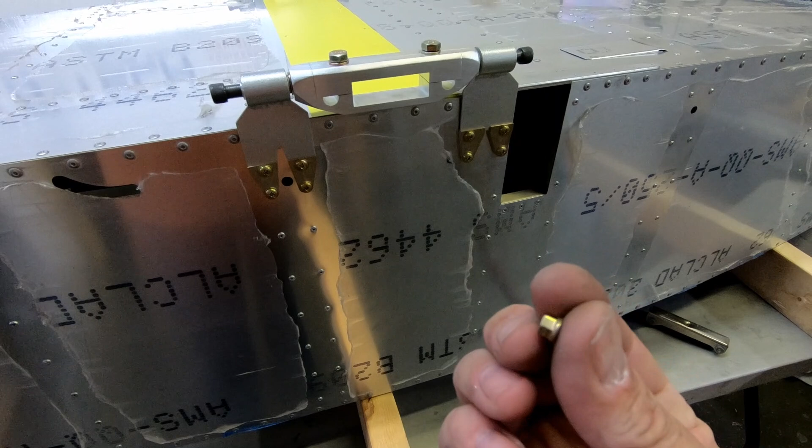I did strip out one of the screws on the other side where I stripped the head out with the Phillips bit. I noticed that some of these metal lock washers tend to be a little tighter than others depending on how they're bent, because they make these in kind of a crimped configuration so they pinch the screw when you put them on. I ended up with one on the other side that was really tight, and the screwdriver slipped, and I stripped one of the screws. So I'm gonna have to replace that screw.

But the other thing I noticed too is that the wrench you need for this doesn't really fit on it when it's misshapen, when it's new. Before you put it on there, you can't really get your wrench in. You can get an open end wrench. Let me see if I can find the one I was using here.

All right, so this is the 7/32 wrench that I was using for these tiny little nuts. You can get the open end on it, so the best course of action is to use the open end to get it started. Then once you get it started, it gets its shape back, and you can fit it in the box end, which it doesn't fit in right now. I noticed that some of these were even so tight that it was stretching the end of the wrench, so if I was using this end the whole time, it would actually start to pop the wrench apart and start skipping the edges of the nut. So these were really tedious to get installed, but I was able to get them all in.

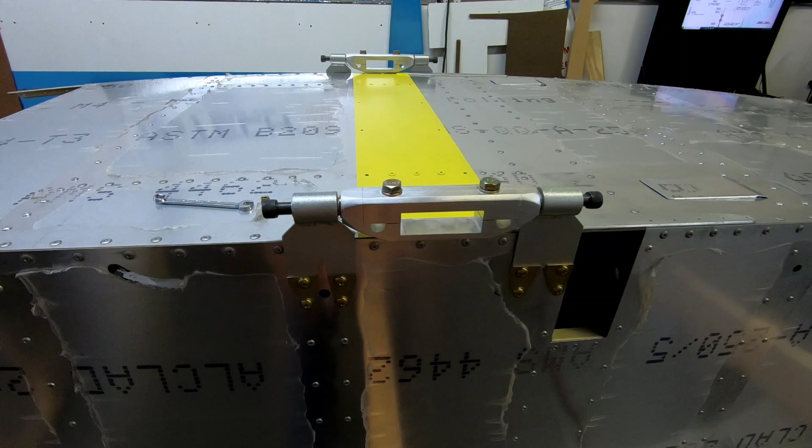They all fit well. I've got my landing gear brackets in. I did do some final sanding and shaping on these on the ends. I'm just going to leave them like this; they look nice enough to me. So what I'm going to do now is go ahead... Oh, you can also see up here I did prime the top underneath, right where the angle brackets are going to go that mount the side-to-side supports for the landing gear.

I did that just so that I can come back later and prime behind here and in front of here where that cover goes over, but I didn't want to have to disassemble the landing gear again after I get it on this time.

This is kind of my final assembly with the landing gear moving forward. I'm going to go ahead and get the landing gear back in the clamps here, and put the angles back on the top, get these holes final drilled, and get the number 6 screws and nuts that need to go into these holes in place so that I can basically say the landing gear is done.

Obviously I'll have to go back and inspect things before I start flight testing, but I do want to have the landing gear basically completed at this point so that when I get it on its wheels, I don't have to take it back off again.

So let me go ahead and get the landing gear back on here, and I'll show you what it looks like when it's done. All right, I'm making some headway on getting this landing gear installed permanently.

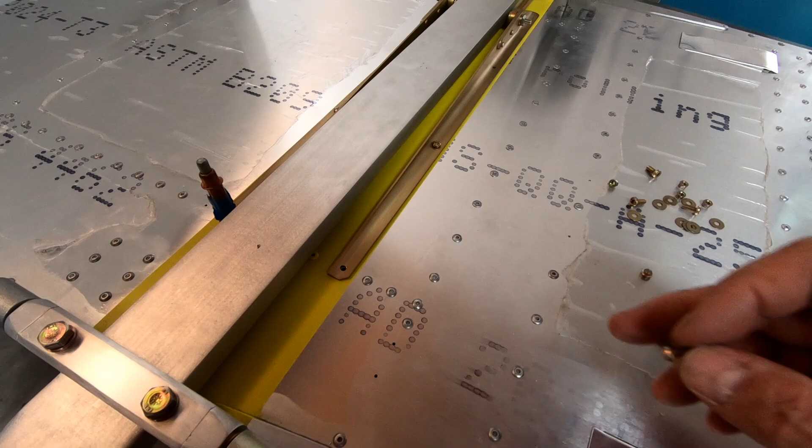I keep running into hardware issues here that are kind of driving me crazy. I purchased screws to install these supports for the landing gear, and the primary reason is it's very difficult to find bolts smaller than a number 10, and of course these are number 6. These are tiny. These are the NAS 1801s I think that I've purchased and used before. These are number 8. You can get these in number 6, number 4.

They get tiny, and what's nice about these is that they have a head you can get a socket onto, but you can also use a screwdriver if needed. I'm not sure why I didn't buy these—well, I do know why. I should have bought these in a number 6 to install this, and instead I bought screws in a number 6 because Aircraft Spruce doesn't carry this size smaller than a number 8, although these do come in a number 6 and smaller.

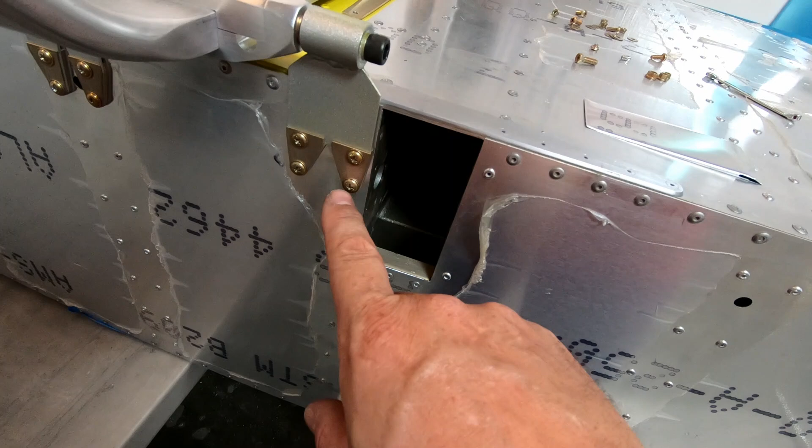So I just thought, well, I'm getting this stuff from Aircraft Spruce, I'll just use screws, no big deal, right? Well, I'm running into problems with the fact that these jet nuts—this is number 6, number 8, and number 10—are so tight that it's very difficult to keep a screwdriver engaged in these screws as you tighten the nut. Even these screws I did on the side here, I stripped one on the other side, not the threads, but the head, because I just couldn't hold on to it tight enough trying to put on this number 8 jet nut.

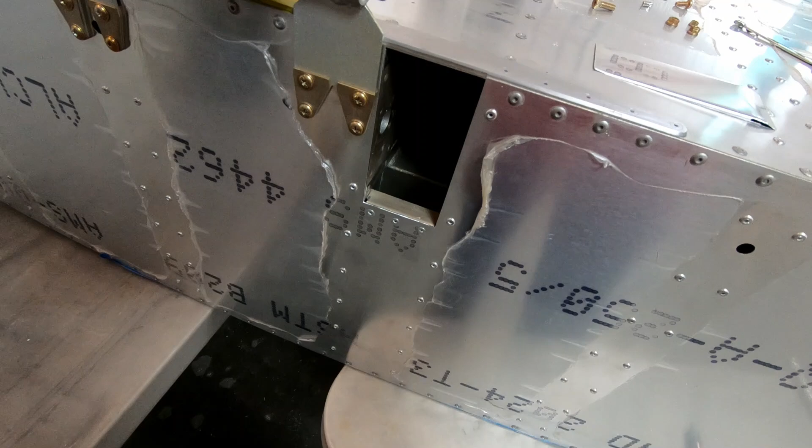Some of these jet nuts are a little tighter than others. I'm not sure I would have used anything else here other than these washer head screws, because I like that on the side here we've got a big surface of screw to support the sides of these steel brackets. If I had used something like this, it has a much smaller head, and I would have had to use a washer under there, which would have been fine, but I think this is better than this with a washer.

But the problem I've already had just trying to get these in place—I've had 2 issues. One, I snapped one of the heads completely off. I tightened it a little bit too much and it just broke. So I've got to get another screw. Of course, I've been ordering hardware at the exact quantity I've needed. I haven't expected that I'd strip out any screws or snap any off.

But the other issue I'm having here is these angles, which are 16th inch angles I'm using for the landing gear support, have a huge radius on the inside. It's the same issue we had doing the wing spars, where this screw is actually not sitting flat. I think you can see it's sitting up and there's a gap underneath it.

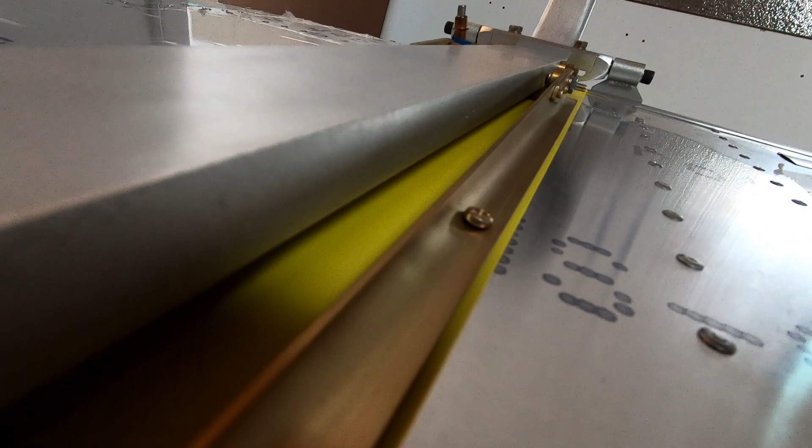So what I'm going to do is take this back off, take it over to my mill, and center each one of these holes. I'm going to use the same size mill or slightly larger than the head size on these screws, and just mill a flat spot over the top of each hole so I can get these screws to sit flat.

I really don't want them sitting with a gap underneath. It doesn't seem to want to pull flat on the bottom of the fuselage either. So anyway, I'm just going to keep working on this. I'm waiting for bolts, because Aircraft Spruce is even short on hardware now. There's shortages of everything right now, rivets and everything else. But I'm missing the correct size screws for these, so I'm not going to permanently install these at this point, but I can always unbolt them here, lift the landing gear, pull these bolts out and replace them when they get in. I am trying to get these angles permanently attached to the bottom of the fuselage.

Now, the other thing I want to say is about the seat. These screws in the back here end up going through, and they just barely miss the flat part of the seat bottom. This is the seat bottom here, and you can see when I drilled through, I hit right there and right here. So that's the flat part that sits on the bottom of the fuselage, and these are just past the edge of the bend. I'm going to have to cut off the top of those screws, just above the top of the nut, so the seat pan doesn't hit the screws going through. Watch out for that when you're making this, because if you got these screws even closer to that angle, you wouldn't even be able to get a nut on them.

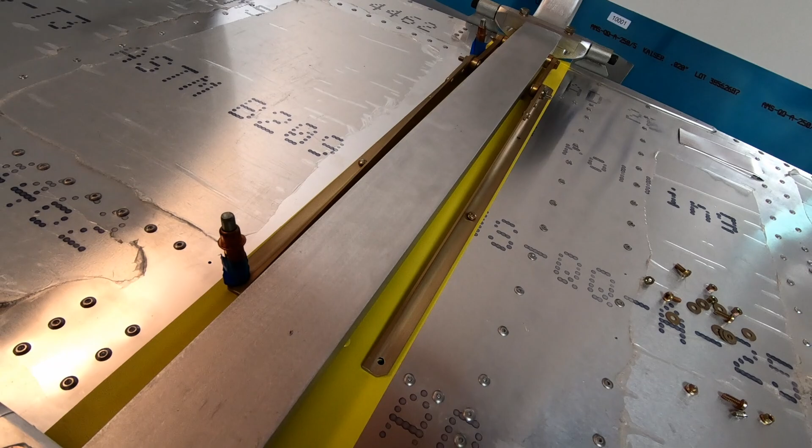So I'm running into a lot of issues, just fit problems, including the fit problems I had getting these brackets in. The one thing I want to mention is that when you're installing these brackets, you can see the rivets here and your center hole here. That's where this screw is supposed to align with, to make sure you hit the cutout in the wing pin plate behind here. I didn't notice that when I was doing this — I just marked everything and drilled it, assumed it would work out. But there's a good visual reference here to tell, before you drill, exactly where you're centered on this hole compared to the center of the wing pin. So again, just lots of little things to look out for when putting the landing gear together.

But anyway, I'm going to keep going here and see if I can get this attached. I do want to get this flipped over. I'm trying to get to the point where I can start finishing the few things I need to do on the rear fuselage and just get the rear and forward fuselage connected together.

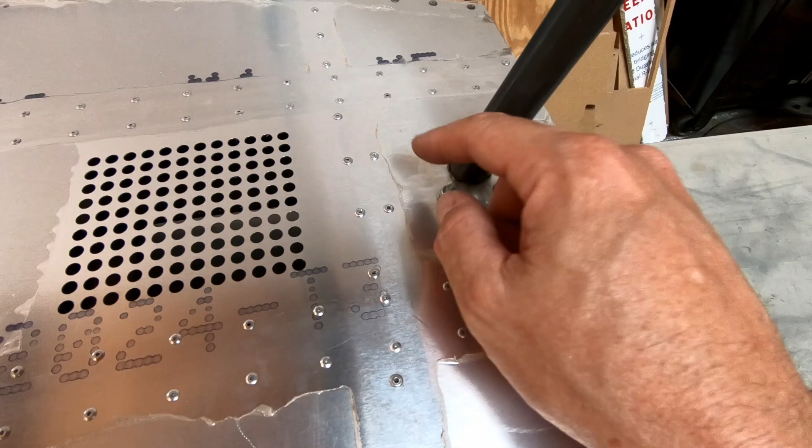I am going to come back here and replace these bolts. This is just hardware store hardware. I do have the correct bolts that are supposed to go in here. In fact, the two bolts I'm temporarily using here are two of the bolts that are supposed to hold the nose gear block in the front. If I get the nose gear block bolted together, get this bolted together, and get all the hardware in here, I really shouldn't have to do much underneath the airplane after this, at least on the forward fuselage, except fabricate this vent cover, which I'll do at some point.

So anyway, let me keep working on this. I'll show you what it looks like when it's done.

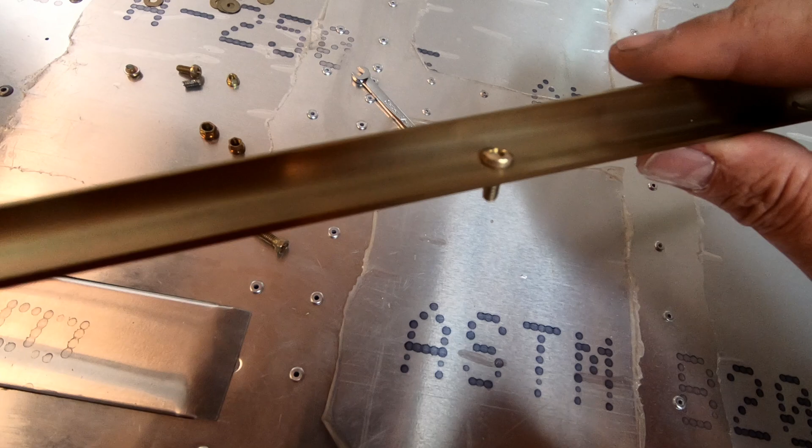Okay, I think you can see here how much I had to recess this screw — it's actually about two-thirds up the screw. In fact, if I take it out, you can see that was done with a quarter inch end mill, just centered on the hole. But yeah, this worked good. I almost have a feeling that the reason I busted off this first screw was because of the angle of the head. When I tightened it down, I think the head just finally broke because it was being bent.

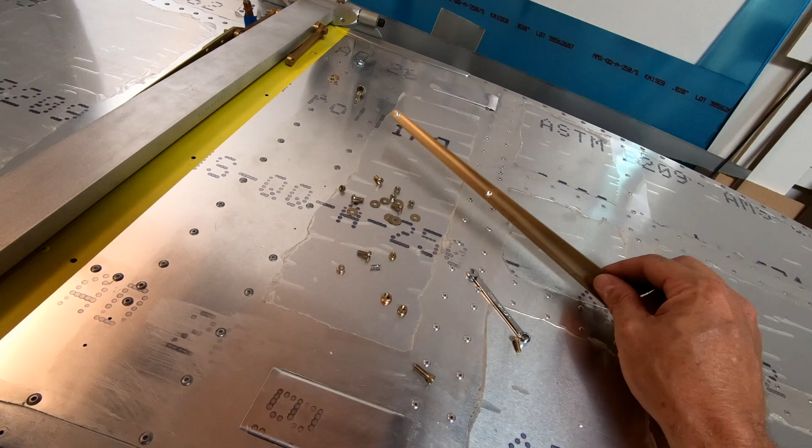And I had the fuselage right side up, and I was just holding a screwdriver under the bottom, trying to pay attention to how much I was wrenching from the top. I was trying not to turn the screwdriver while turning the wrench, and I don't think I noticed how much that was bending under there. But I'm going to keep moving ahead — we'll get these screws installed now.